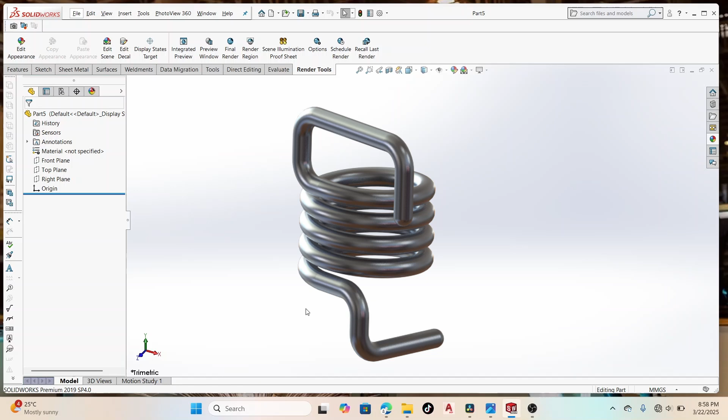So in this tutorial, we shall be making a spring. Here we shall see its application in the silage making machine final assembly.

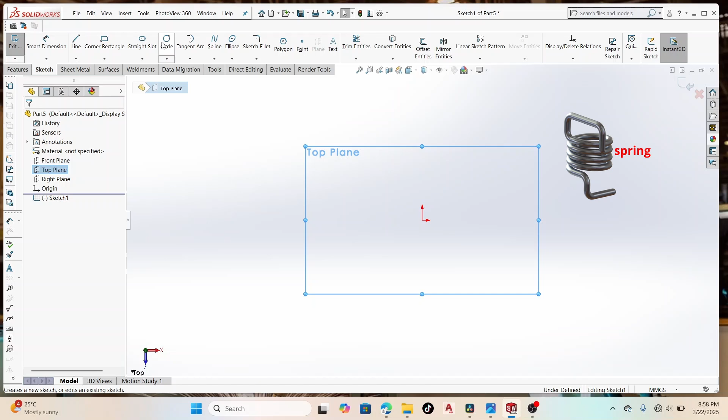So start with the top. Make a simple circle, 15 millimeters in diameter. Apply a helix. And I'll maintain all those.

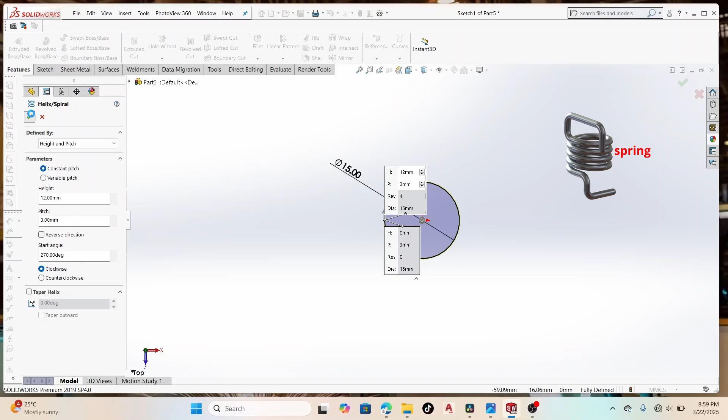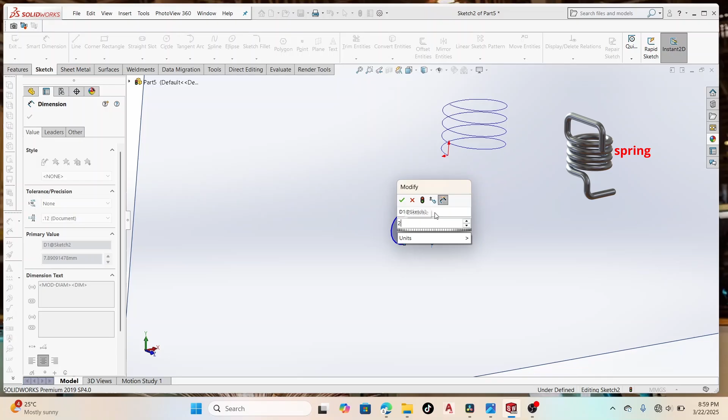Want to come and apply a feature. Say okay, then I'll come and draw a circle. Increase 2.5 like that. Then I'll come and add the relationship.

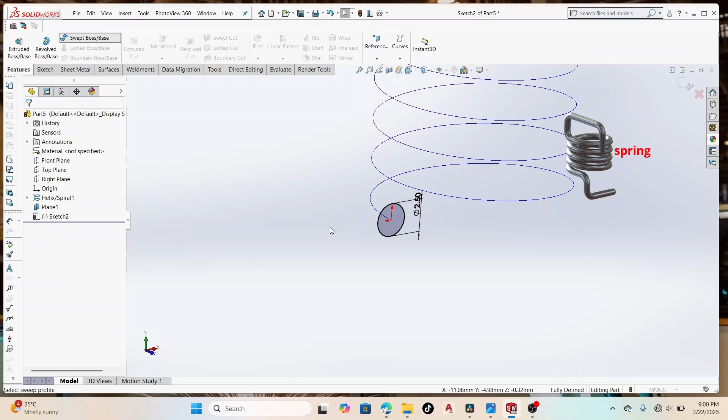Okay, so I'm going to revolve, to sweep, edge, then curve. So this is the first part of the spring. The next part is about making an extension from this point.

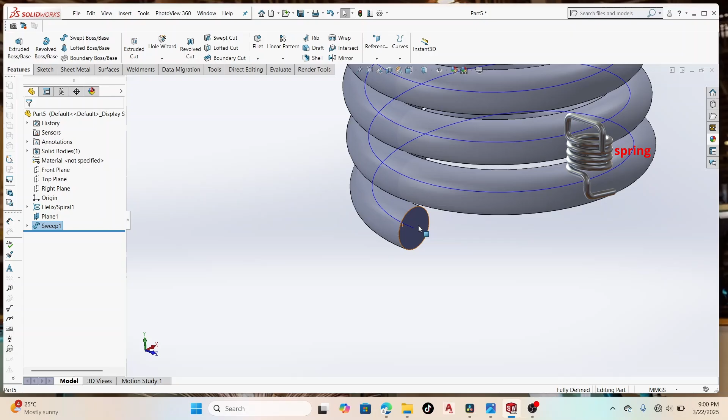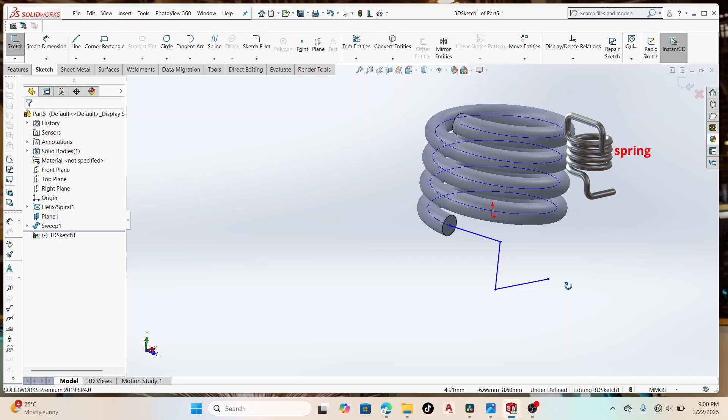And I'll use a 3D sketch. It will run from this point and down, then the side like that. So this is 7.84.

This is 8 millimeters. This is 13. We also have a fillet. It is of 3 millimeters, so I should reduce this 3 millimeters like that.

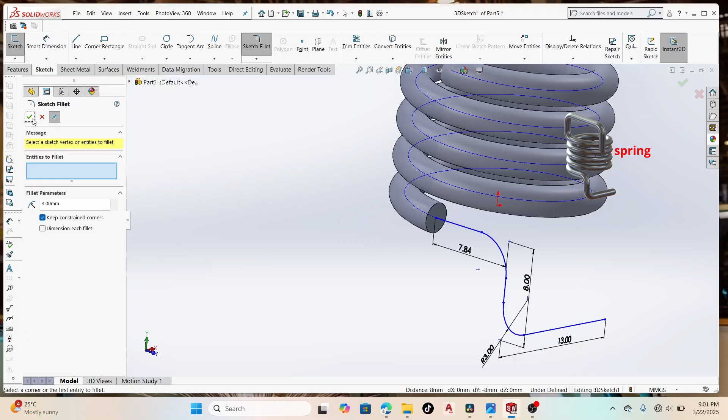So do the conversion of that to a sketch. Then you repeat the same command, which is the sweep. Okay.

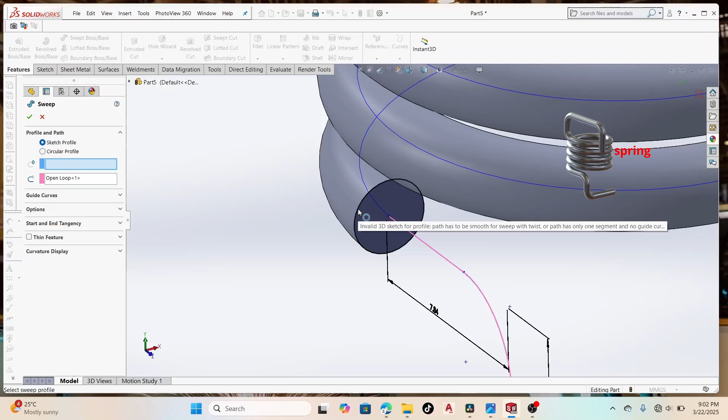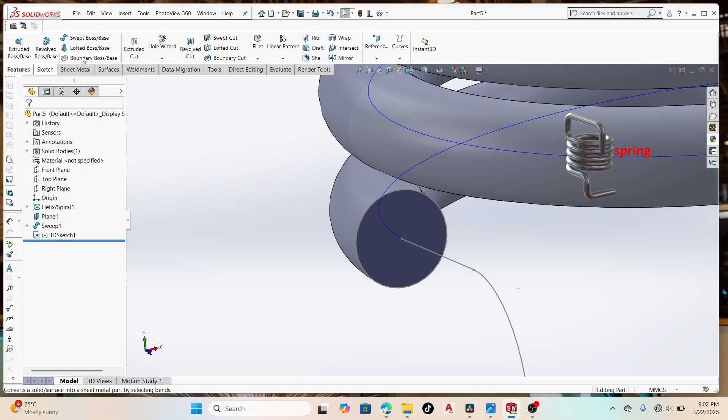I'm repeating this command. Show why it's misbehaving. Okay. I've gotten it.